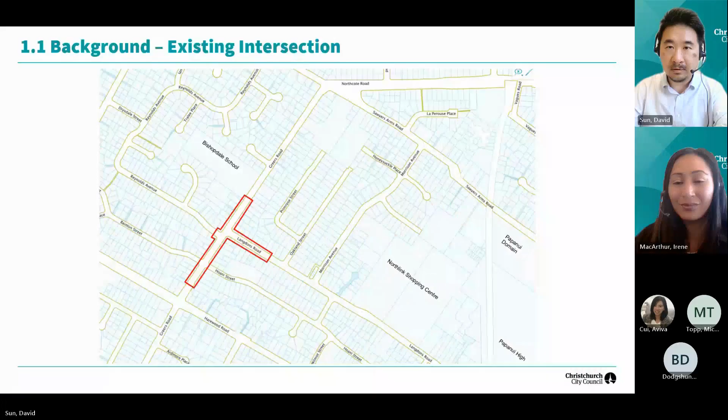All right, thank you very much. My name is David Sun. I'm the Transport Project Manager of Greers Langdons Road. I hope you can see my screen. Yes. Great.

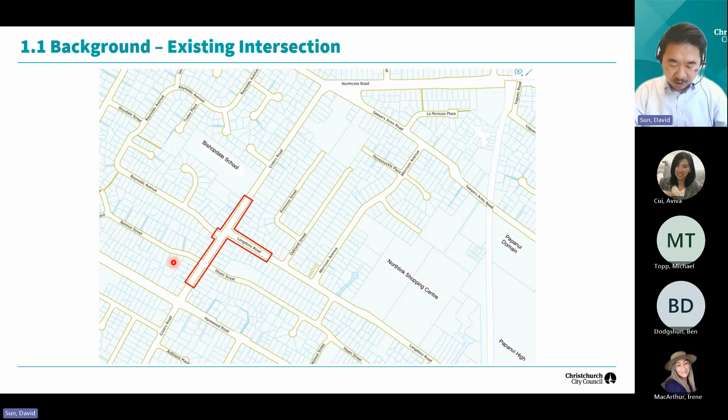I'm going to give you some background information about this project, so why we are doing this and what kind of objectives we are going to achieve. And I'm also going to cover the options we have investigated and how we came to these two options.

So on the map, we show the extent of our project is mainly at the Greers and Langdons intersection, and also a little bit of the Reynolds and Greers intersection. The kerb and the road marking extend further on either side of Greers Road and also on Langdons Road.

So why we are doing this: the main reason is the development of Northlink Shopping Centre on Langdons Road in recent years. It attracts a lot of vehicles from the adjacent areas. So it has caused some traffic issues, like a lot of vehicles coming from the south of Greers Road want to make a right turn onto Langdons Road, but it's really hard to make it.

And also when the customers leave the shopping mall, if they're living in the northwest area, it's really hard to make a right turn from Langdons onto Greers because these two streets are so busy now, and it makes it very hard for pedestrians and cyclists to cross the road.

So this busy intersection has caused some traffic to avoid using it. Say customers heading back home, they may turn onto Morrison Avenue and then make a left turn onto Sawyers heading north, or they may take a left turn onto Greers and turn onto Reynolds. So those are some issues we are trying to solve.

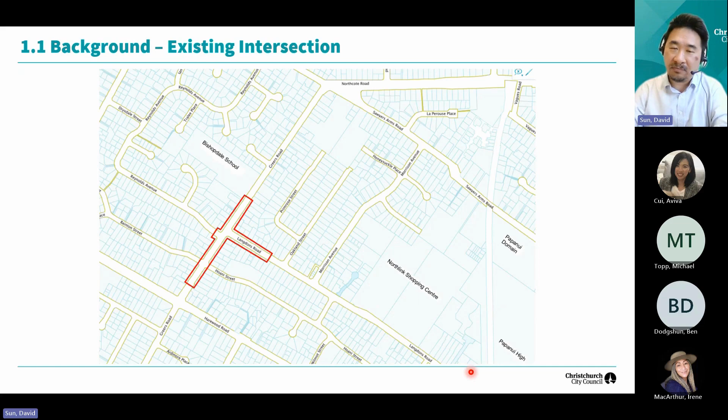And secondly, roundabout, if we remember the roundabout on the east side of Langdons, near the Northlink Mall, is very busy. So it's really hard for pedestrians and cyclists to cross the road as well. So roundabout cannot provide a safe crossing for pedestrians and cyclists. So we didn't take the roundabout option further.

So we mainly focus on the rest of the options, which is to make the intersection signalized. So there are 2 big options between these. One's either to signalize both intersections, Langdons Road and Reynolds, as a dogleg intersection, or we signalize Langdons only. However, by signalizing Langdons only, there are some variations like either to fully keep the Reynolds Avenue open or left in left out of Reynolds or left in only or fully cul-de-sac.

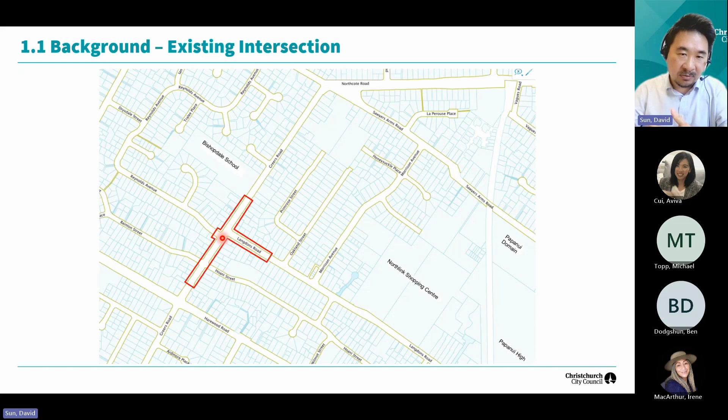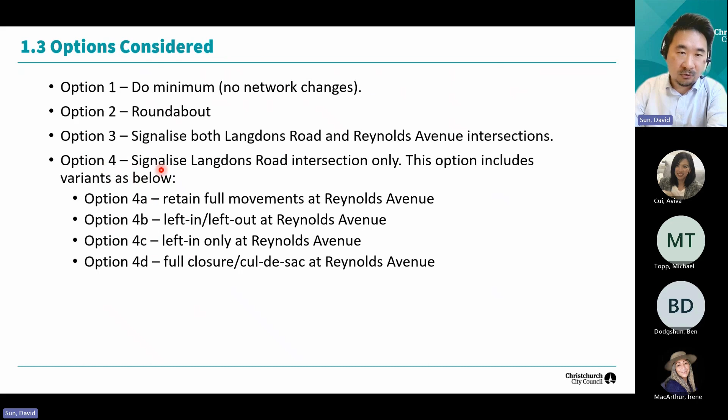For the dogleg option, actually, we didn't take it further either because the dogleg option will cause a lot of delay to Greers Road in terms of operation, because the reason is these two intersections are too close. There are some dogleg intersections in Christchurch. However, this one probably is much closer than those, so it's not very suitable for a dogleg. So I'm going to provide some details on these 4 variations of just signalizing Langdons Road intersection.

So the first one, sorry, that's option 3 we talk about, is to signalize both. These are the negative impacts. The reason why we didn't think it's a good option is because if we signalize both intersections, we have to push the limit line back south of Reynolds Avenue on Greers Road. Unfortunately, Reynolds and Langdons cannot have a green light at the same time because the movement, say for example, Reynolds heading to Langdons, will conflict with the right turn of Reynolds. So that means for Reynolds Avenue, we have to introduce another separate green phase.

That will cause more delay for Greers because every second of the green phase we provide for Reynolds will be deducted from Greers Road. So that means Greers Road would have less green time. That will make significant delay on Greers Road. And secondly, it will have a significant impact on Greers Road operation.

For example, because the site is very narrow, we cannot purchase more land. If there's a southbound vehicle from Greers Road wanting to make a right turn into Reynolds, they will block the following vehicles on Greers Road. So that will be some significant operational impact. And it will also cause delay for pedestrians to cross Reynolds Avenue.

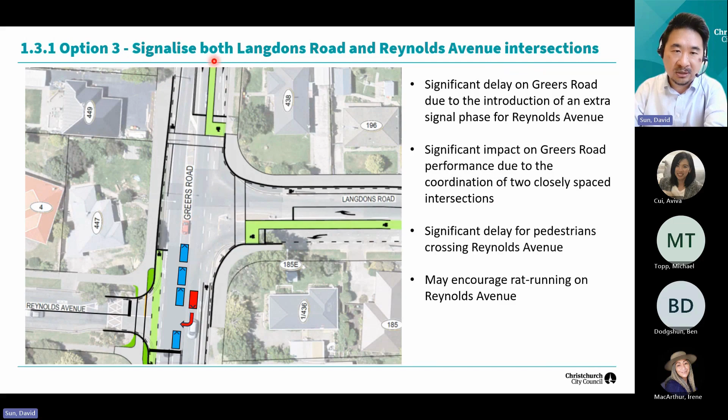And by signalizing both intersections, we may encourage more traffic to use Reynolds, coming from, say, the north west area, coming from Reynolds, and make a left turn and a right turn onto Langdons to avoid the Sawyers Arms intersection, because currently it's really hard to make a right turn over there. So considering this impact, we didn't take option 3, which is the dogleg option, further.

So for signalizing Langdons only, we got 4 variants. The first variant is to keep the full movement at Reynolds Avenue. So this one has, as mentioned before, some potential operational issues. Same as the slides mentioned before, if there's a vehicle coming from Greers north wanting to make a right turn, they will block the following vehicles. And there are also some safety issues here.

For example, if cars are waiting for a right turn onto Reynolds, there may be some vehicles queuing for a right turn into Langdons because that movement is really popular. However, these cars will block the visibility of the car waiting for a right turn and the northbound car on Greers Road. So they couldn't see each other. So if the red car made a right turn, they may clash into each other. So that's a potential risk of having a right turn into Reynolds.

And there's also a potential risk of having a right turn out of Reynolds. Similarly, the queuing cars waiting for a right turn onto Greers may block the visibility between the cars waiting for a right turn from Reynolds and a southbound vehicle from Greers. So based on this, the project team found it's not safe to keep a right turn in and out at Reynolds Avenue. And another factor is the volume of right turn in and out is not very high. So the project team thinks it's better not to allow these two movements.

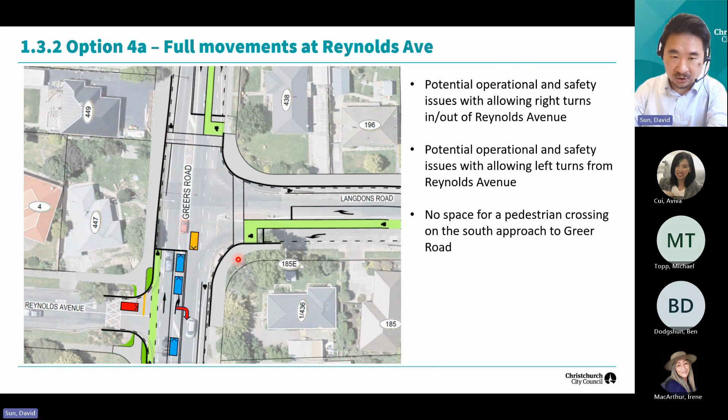Yeah, so the second option is, as we mentioned previously, there are some safety issues of having right turn in and right turn out. So we are thinking to ban those movements, just allow left in, left out at Reynolds Avenue. This option has also got some potential.

This option actually gets rid of the safety risk of having the right out, but also has some potential safety issue of allowing a left in, left out from Reynolds, because the vehicles coming out from Reynolds may not be able to see the northbound vehicles when trying to make a right turn onto Langdons. So there's some potential conflict points around here.

And this option also does not have a pedestrian crossing on the south approach. And because of the banning of the turning movements, this option has an impact on the accessibility to the residents living in this area.

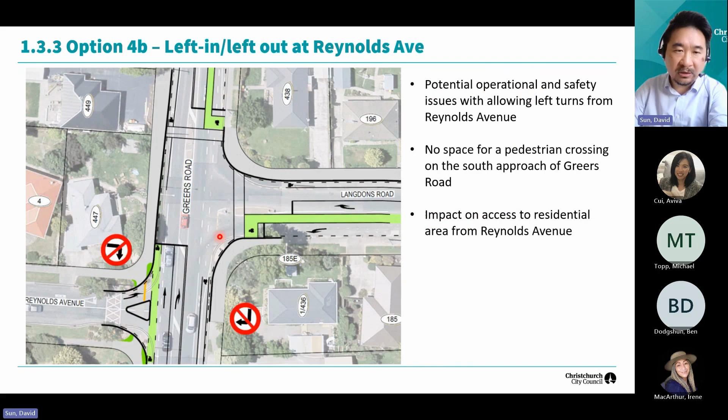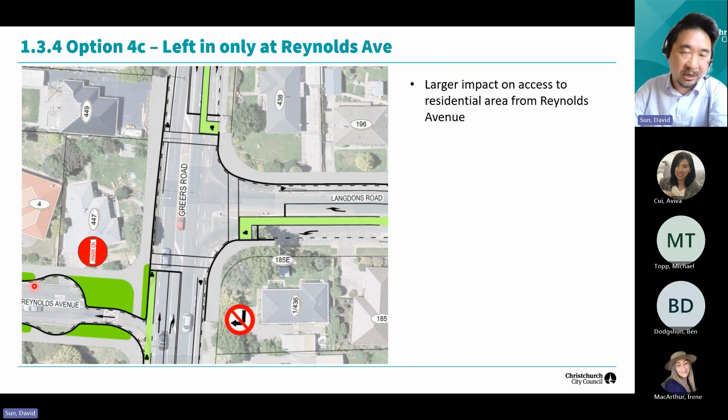So considering the risk of having the left out, the project team thought about having the left in only. So this option gets rid of the potential safety risk of having left turn out vehicles. However, this will have a bigger impact on the accessibility to the residential area.

So the last option we considered is to fully cul-de-sac this intersection at Reynolds Avenue. By doing that, it definitely can provide the safest intersection, because the school kids can just walk through without any delay, without worrying about the vehicles. However, this will have a big impact on the accessibility to the residents in this area.

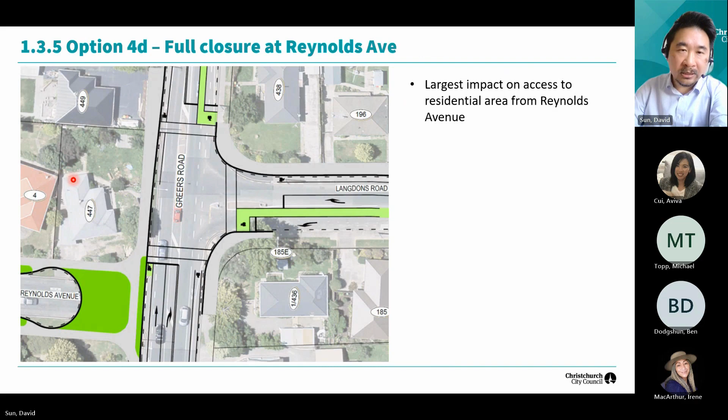So, sorry, it's not a very good sequence. But anyway, the reason we consider this is this big living area is confined by Sawyers Arms, Greers Road, Reynolds, and Highsted. These areas highlighted in blue have 268 houses and only have 3 access points. So if, say, we fully close Reynolds Avenue at Greers Road, they only have 2 access points.

So that means it impacts the accessibility and the resilience. So if there's some road work anywhere, these residents only have 1 access point. So we undertook a traffic count survey at these 3 access points on the same day. We found out most of the residents here are using this access point in the morning.

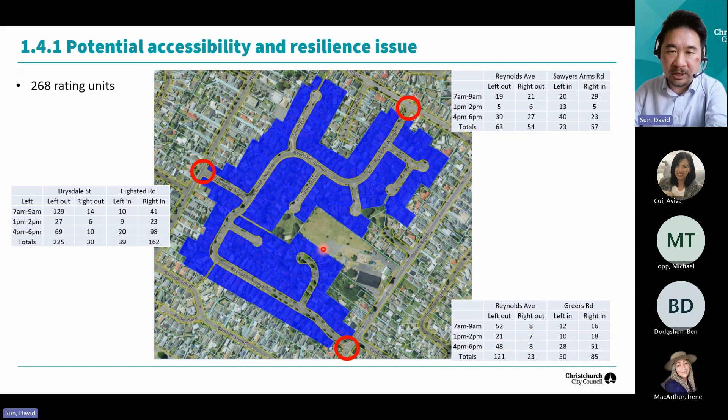So that's the reason we are thinking we need to propose 2 options to the residents to see what they think is more suitable for them, whether they care more about accessibility or more about safety. So we fully developed these options into the consultation plan. What we are going to do is really similar, other than the treatment of Reynolds Avenue. Other elements are very similar.

So we are going to remove all the parking from Harewood Road to Langdons. We are going to turn Langdons into a signalized intersection. We are also going to provide a flush median between Harewood and Langdons Road. And unfortunately, 2 big trees around the corner need to be removed.

So in terms of car park removal, we lose 8 parking spaces from Harewood to Langdons on either side of the road. All the parking is going to be removed for the flush median and right turn lanes. And north of Langdons, from Langdons to Bishopdale School, we are going to lose 7 on the west side, around here, and 3 on the east side, around here. That is to make some room for the left turn lanes into Langdons Road.

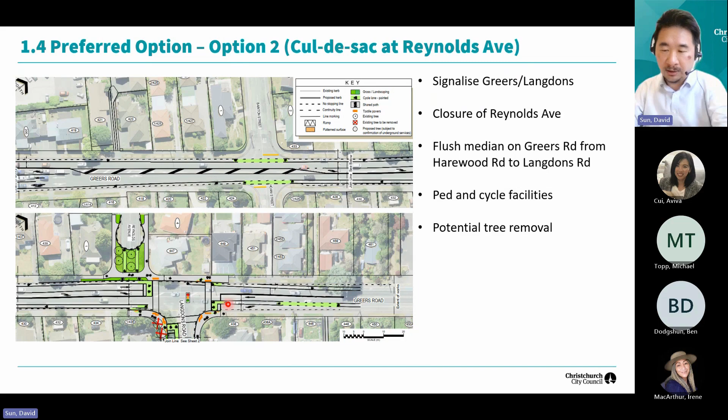On Langdons Road, we are going to remove 14 parking spaces on either side of Langdons from the Greers Road intersection up to here.

That's the reason we have to introduce formalized two turning lanes, and the turning lane for the right-turn vehicles is about 100 meters to accommodate that demand.

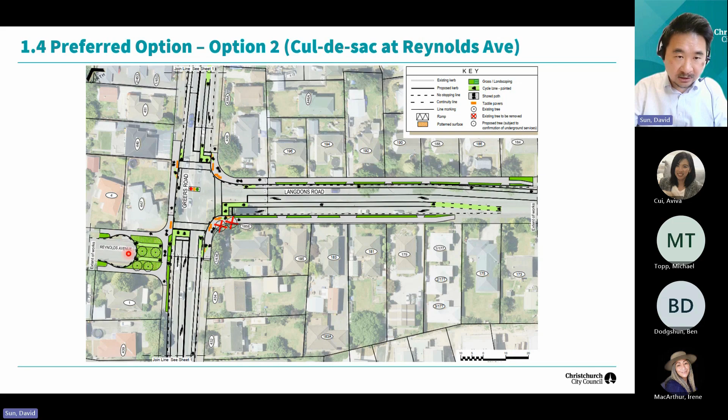And Reynolds Avenue depends on the option we are taking. For the cul-de-sac, we are going to take a little bit more; we are going to take 6 parking spaces off. For the left in, left out option, which is this one, we are going to take 2 parking spaces off. So in total, the parking loss is about 60 for the cul-de-sac and 56 for the left in, left out. We've got a table with all the information on the parking removed in the consultation material.

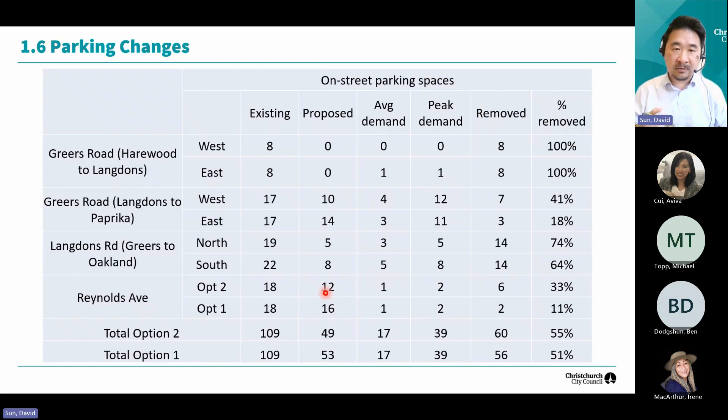So if you have any questions, or you feel something you are interested in in this project, or something you've got a concern you'd like to raise to us, we're more than happy for you to put in your questions. We can have a look whether anything can be improved.

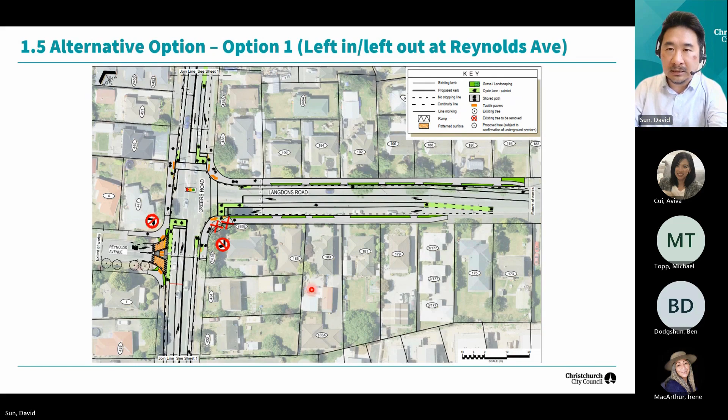Thank you very much. I'll hand it over to Irene. Thanks, David. And Aviva will drive for us.

Some of the feedback we got from early engagement with key stakeholders impacted the way the design scheme and the project team approached some of the options, and the reason for giving two options. So we approached Reynolds Ave and the residents nearby that may be impacted with on-street parking. And also a letter was dropped prior to public consultation to meet with those who had any queries or questions about the proposed plans.